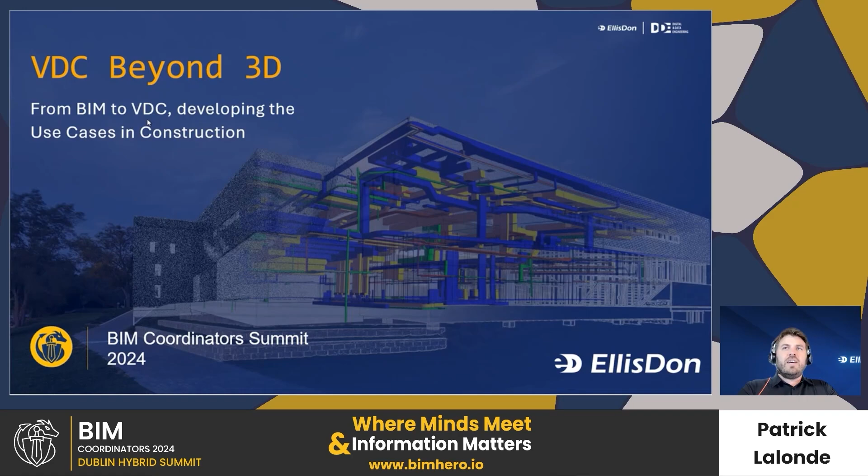So a little bit about myself. Patrick Lalonde, Senior Director of Digital Project Delivery at EllisDon, one of the largest general contractors in Canada. I've been in the construction industry for about 20 years, working both as a laborer in the office and kind of at a corporate level, as I do now. Been with EllisDon for about 13 plus years.

I served as an instructor at Algonquin College Center for Construction Excellence in their BIM Lifecycle Management Program for about 4 years, 2018 to 2022. I sit as a committee member on the CSA group, the Canadian Standards Association, for the digitization of information for the built environment, otherwise known as ISO 19650, and the implementation and adoption of that within Canada.

I also sit on the construction management think tank of Building Transformations, a national industry organization in North America, and I'm a board member of buildingSMART Canada, as well as a board member and founding member of Digital Built National Capital Region, a local advocacy group for digitization in the built environment.

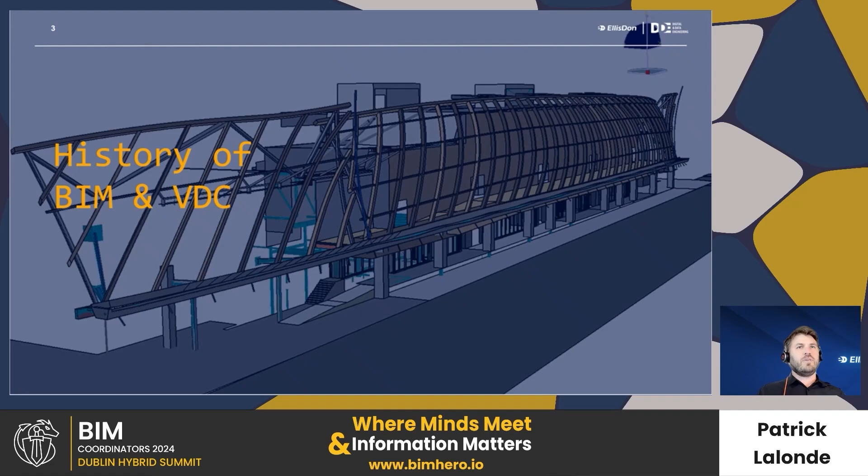So I want to get started by talking a bit about the history of BIM and VDC, where things came from and how we got to our current state of the use of the technology. So drafting and illustrating, engineering documents, blueprints, and communicating design intent came from the traditional methods of pencil and paper drafting, taking a three-dimensional concept, converting that to 2 dimensions on paper, and those were the blueprints that were sent to the site to execute and build. So, throughout the 50s, 60s, before computers, that was the main way to do that.

Then in the early 90s came AutoCAD, or computer-assisted drafting, which essentially digitized that process of traditional manual drafting, pencil and paper. So that was an evolution of that process, a first step towards digitization. But what really came as more of a revolution to the process was the introduction of building information modeling. I've got that in there as about 2005, where it became mainstream, but I guess that's still up for debate. But mostly mainstream around the mid 2000s.

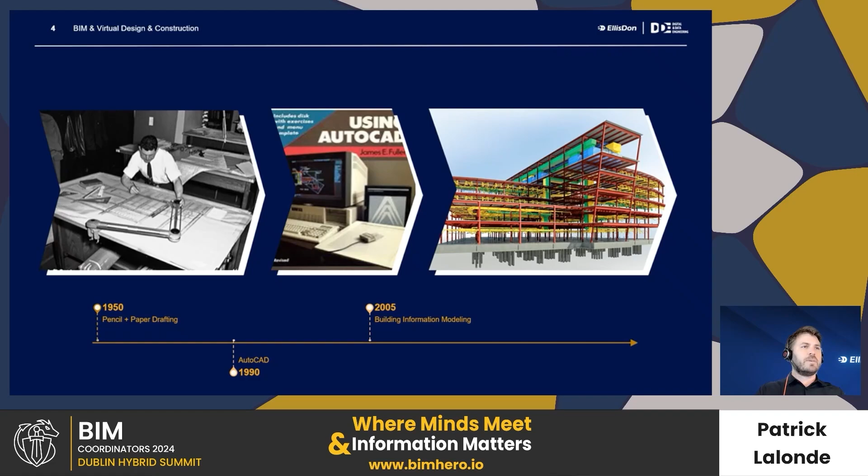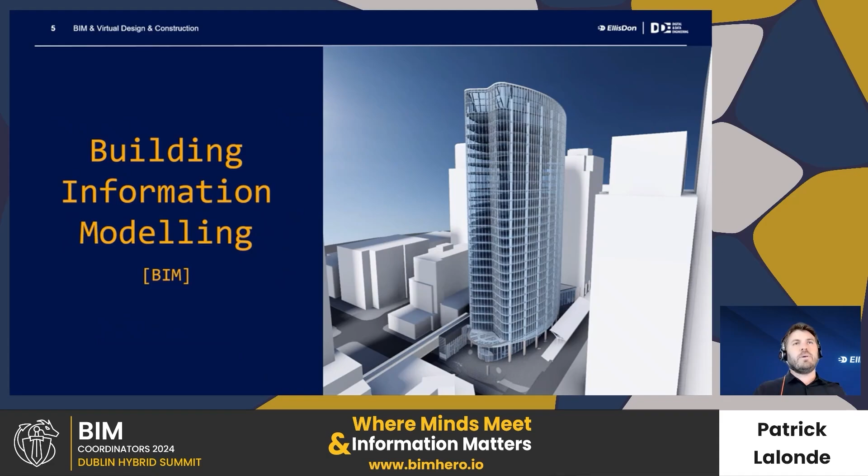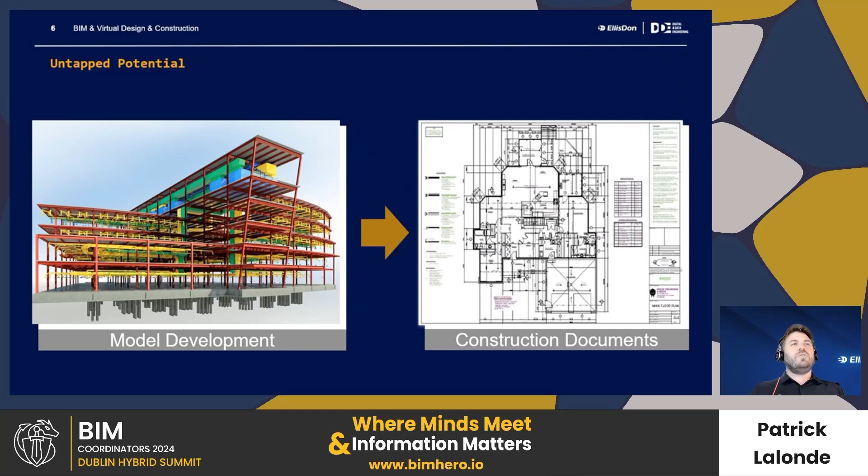Building information modeling can be defined as that process of creating an intelligent 3D based model that gives AEC professionals the insights and tools to effectively plan, design, construct and manage buildings. It's really the definition of that process, building that information model. Traditionally, model development was only done for a single purpose: to produce those blueprints. Going back to the early days of drafting and 2D CAD, we still had that same mindset of developing the model only to produce 2D drawings. So there was a huge amount of untapped potential because we had this very intelligent 3D model and we were reducing it down to 2D PDFs and blueprints.

Over time, we started to realize the potential in these 3D models to do more than just produce the construction documents. They were also supporting our logistics planning and the scheduling and sequencing of work. We were able to use them for quantities and material estimates, for fabrication and prefabrication through digitized processes and CNC machines, and for advanced coordination, bringing all those models together and understanding what we intend to build and how we design it. And then the visualization piece of seeing the design intent in that 3D medium helps to visualize, understand and communicate throughout the process.

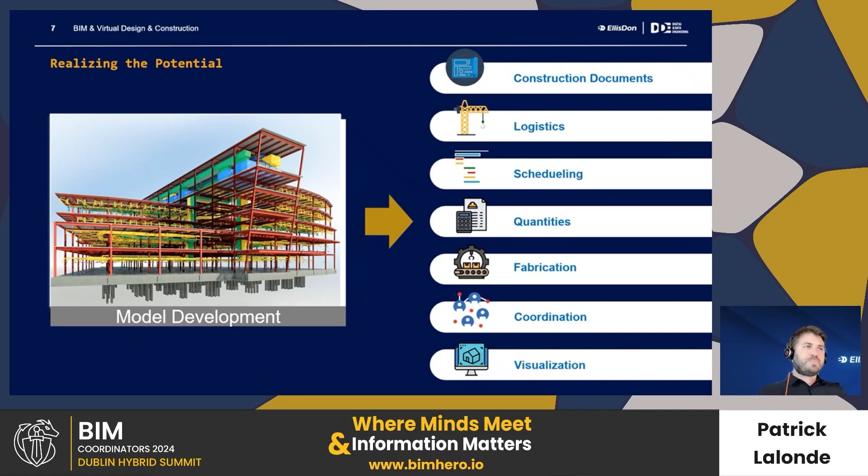And so that's how we got that transition from building information modeling to virtual design and construction. VDC is an acronym that we use to encompass all of the ways that we use those BIM models throughout the construction process and throughout the building life cycle.

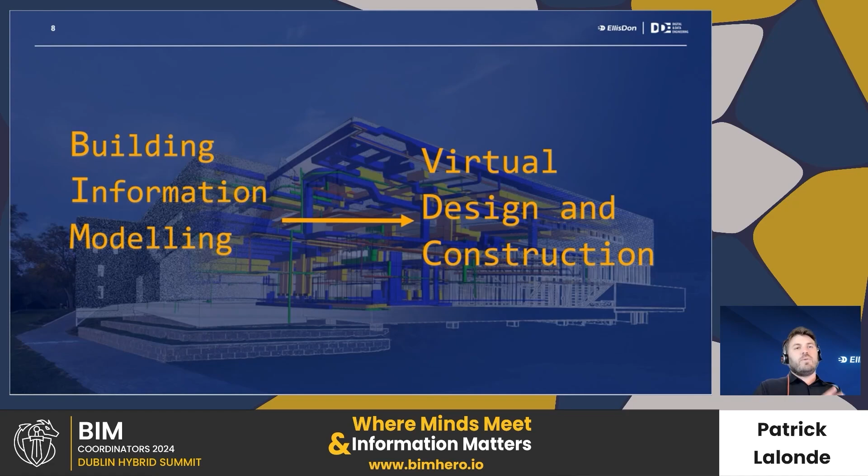And that's where we come down to the VDC use cases. So we've kind of broken down how we use the BIM models throughout the construction process for very specific functions and outcomes throughout the project.

And so those use cases are defined into sort of buckets or categories, one being 3D coordination, 3D modeling, 3D logistics, 4D schedule and progress tracking, quantity takeoffs, augmented reality, virtual reality, and extended reality, BIM asset management, reality capture with drones, reality capture with LiDAR, reality capture with 360 photos, and the BIM management piece. And I'll go into details a little bit about explaining these use cases.

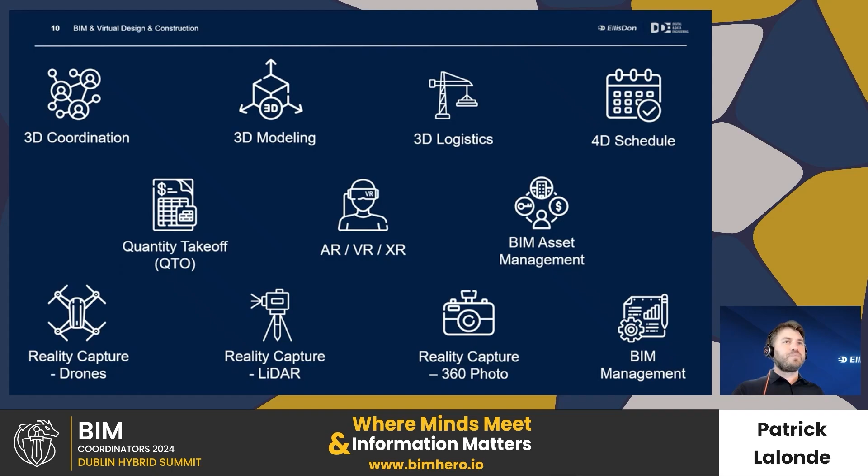So with 3D coordination, that's really the bread and butter of what VDC does: centralizing all of that 3D information into a single source of truth, and then using that to visualize and understand how multidisciplinary systems interact with each other and work together, sort of virtually building the building first and working out all those issues.

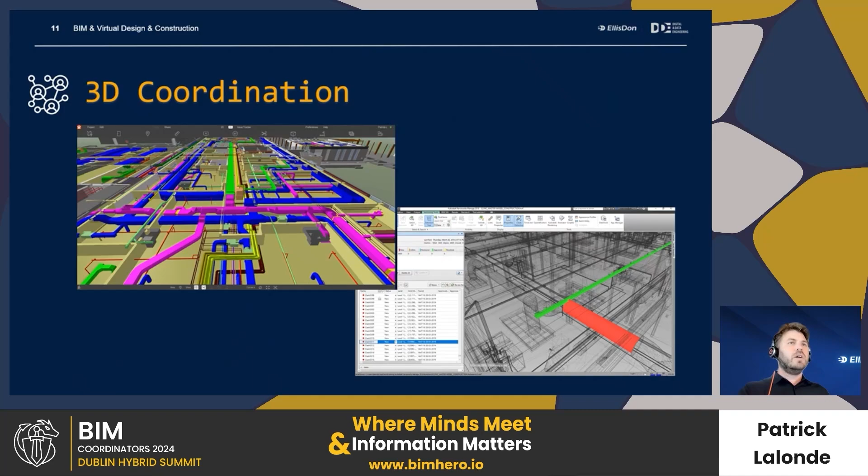And so I like to make the association of what 3D coordination is. It's not a revolutionary concept. It's not a new concept that we've introduced into the industry. It's just an evolution of what we've already been doing. Just we're doing it with different tools.

So I use the Lightbox version 1.0 as an example of the exact same process with two-dimensional paper, laying multidisciplinary drawings on top of each other on top of a light box, and you can see it makes the drawings transparent, so you can actually coordinate and see the different systems and if there are any conflicts.

And so it's exactly what we're doing in the BIM world and the VDC world with the models and projectors, that sort of Lightbox 2.0. Exactly the same process, same people around the table doing the same thing, but with more advanced technology.

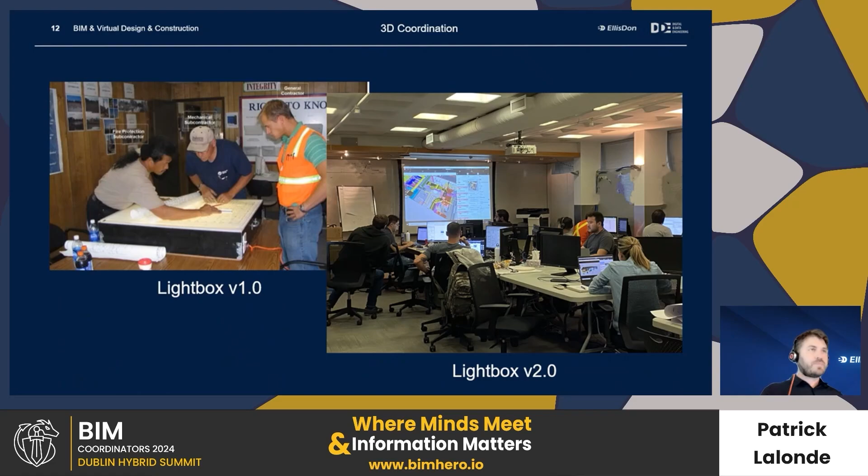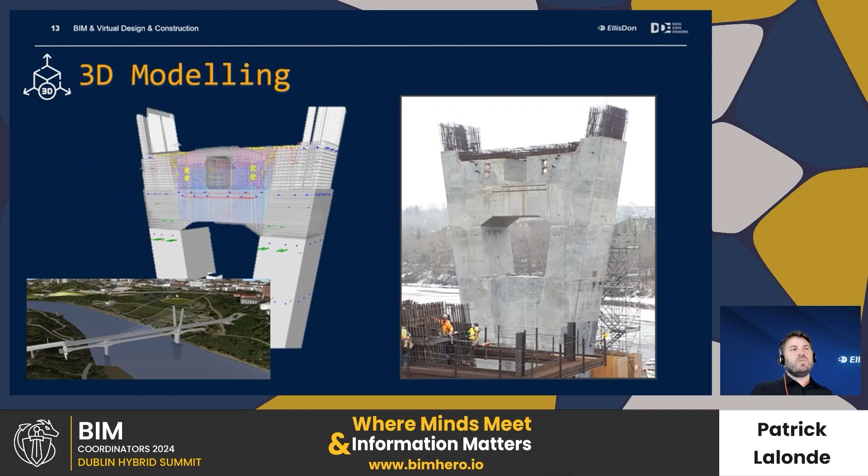The next use case is the 3D modeling. We're actually creating very detailed 3D models of exactly what we're planning to install in reality. So in this example, we've got very detailed rebar and sleeving of a bridge pier, so that we can accurately understand and work out any issues associated with all of those components and detail it very specifically in that virtual environment, so we can execute very efficiently in the real world.

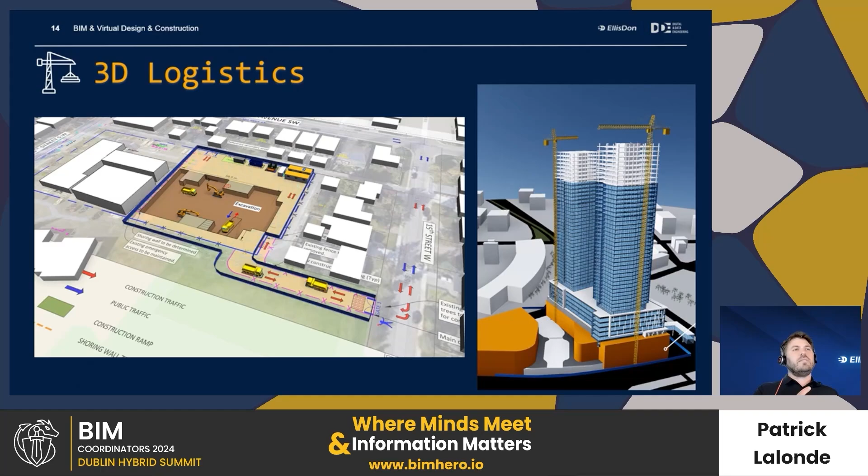3D logistics is taking those logistics plans, which were traditionally done in PDFs. We can insert the BIM models into logistics planning software, create three-dimensional models of all of the road shutdowns, hoarding, excavation, ramps, tower cranes, and start to understand all of those other pieces that make up the construction site.

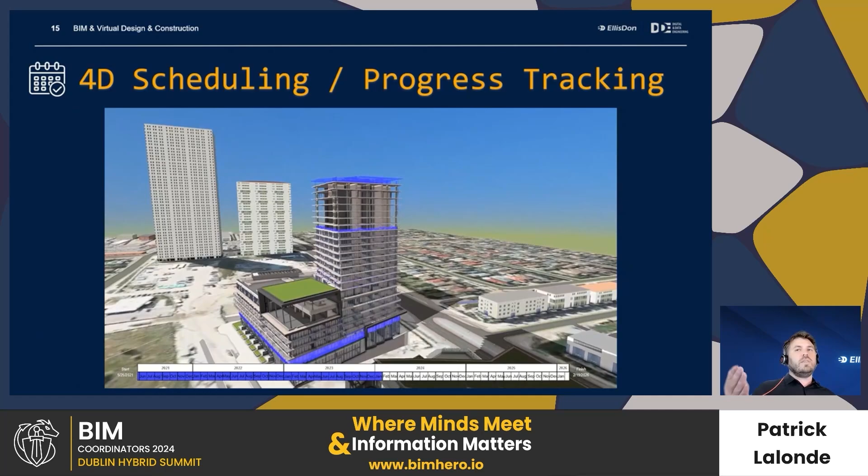The 4D scheduling and progress tracking, that is taking that 3D model and connecting it to a schedule and being able to animate and watch the sequence of work. So what that entails is taking a traditional Gantt chart schedule with activities and line items, start and finish dates, and connecting those line items to the geometry in that 3D model. And so you have that time plus 3D equals your 4D.

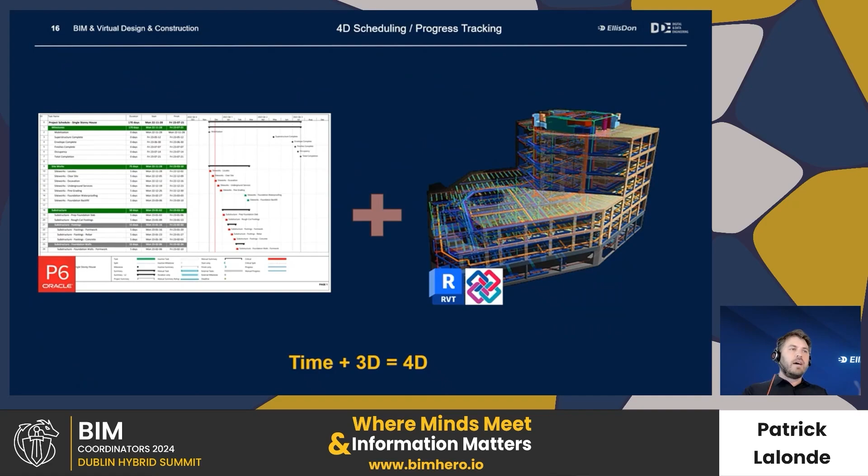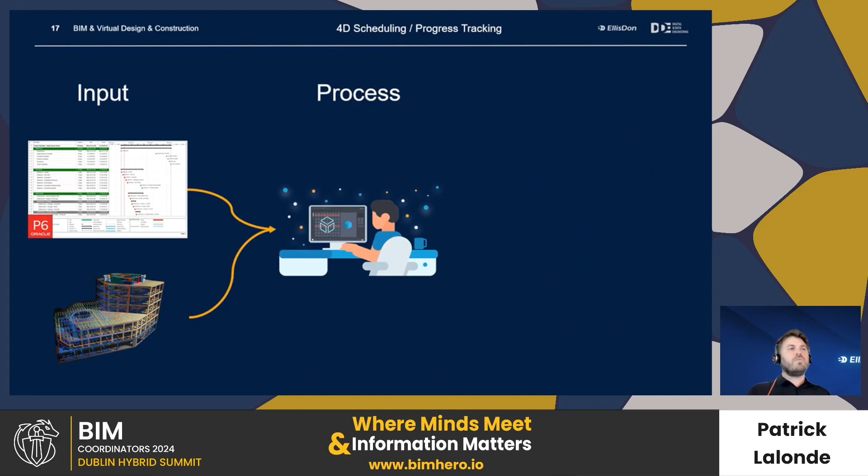And so what that requires is inputs of your schedule, your 3D model, and then you need to process that information, connecting those elements in specialized software, and then you can have the output of actually having that animation or that video to watch to illustrate that construction sequencing.

And then you also have BIM progress tracking, which is an extension related to the 4D, but a bit of a different process. The 4D animations typically project the baseline construction sequence that you're planning to do, and then progress tracking is actually ingesting more actuals back into the system and tracking exactly how the different components are starting and finishing.

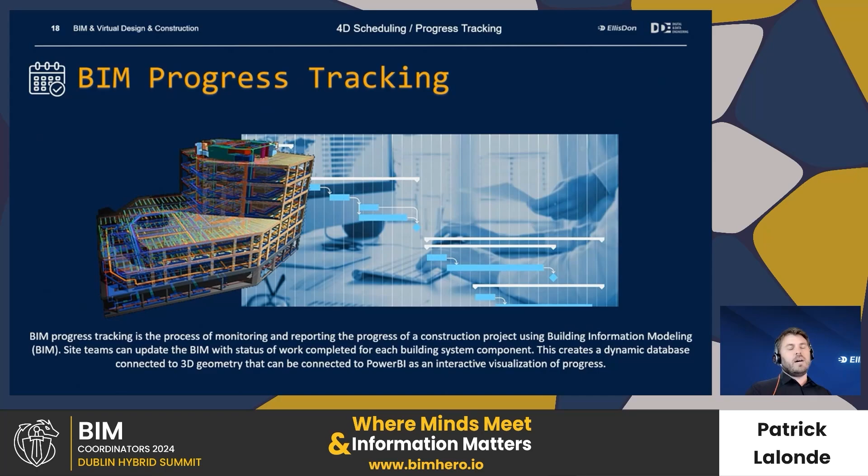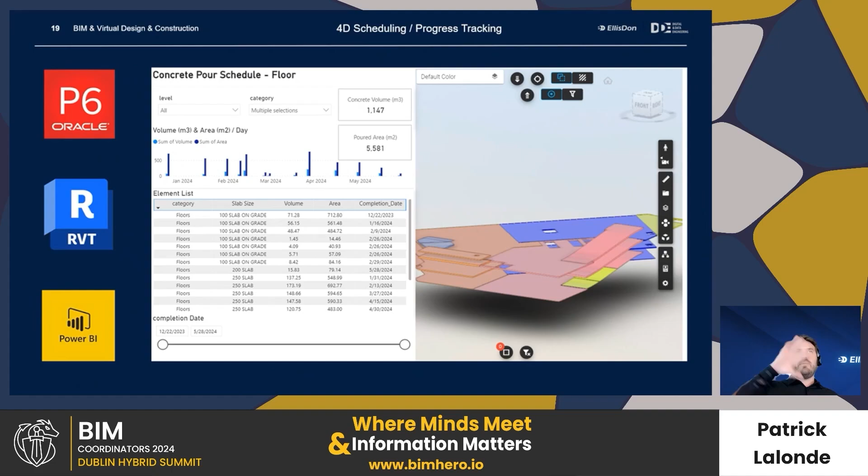So we can take in the Revit models, the schedules, and plug that into Power BI software, and itemize exactly the different pieces and the start and finish dates and volumes and quantities associated with those. So we can actually track more detailed progress throughout construction with methods like this. So the 4D animations is one thing, and then the progress tracking is another thing, but they're very interrelated.

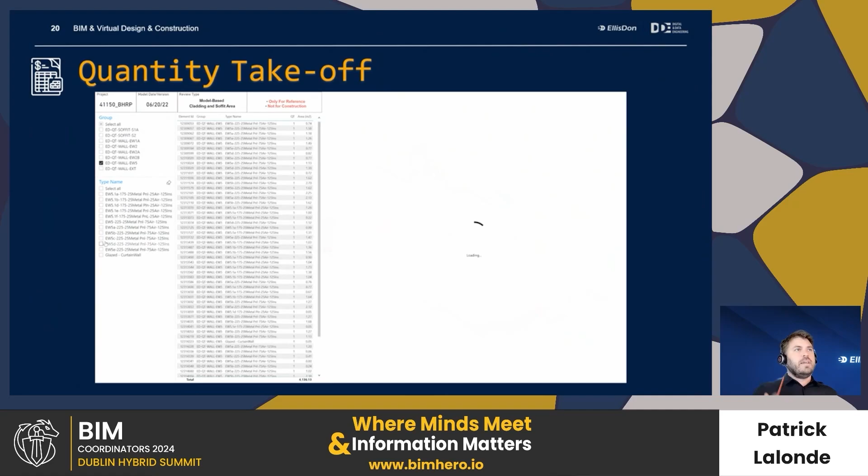Next, we have quantity takeoff. So thinking of the models as an itemized inventory of all the building systems and components. We can catalog that, itemize, sort and filter all of those components, and get easy quantity extractions and lists of all of those building systems to support design development and to support the procurement process.

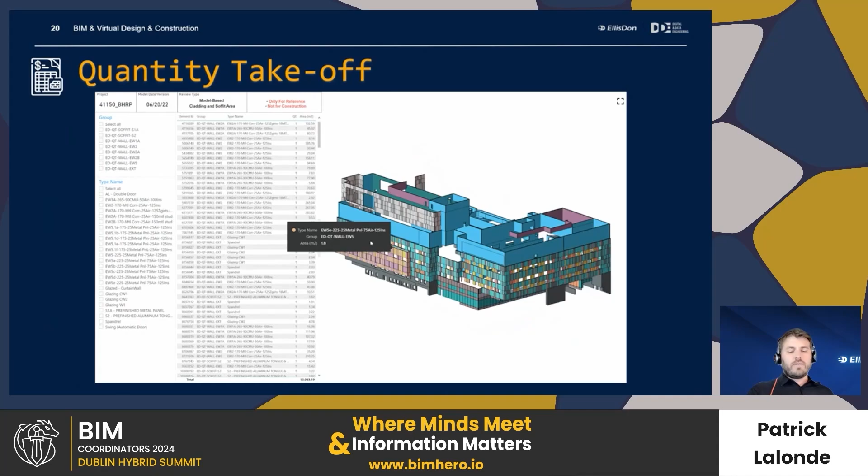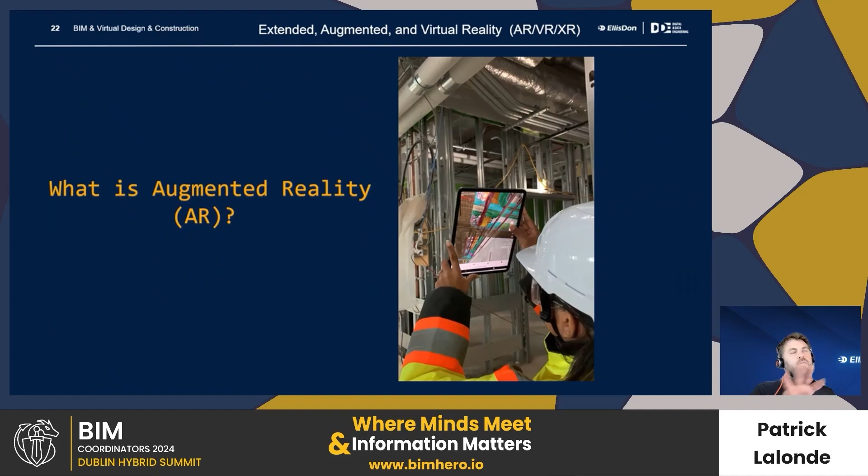Next we have extended reality, which is both augmented and virtual reality. Augmented reality is essentially overlaying the virtual environment, the 3D model, with the real environment. Using devices such as an iPad, iPhone, or sometimes a headset, you can overlay the 3D model with the real space, so you can walk out on site and see exactly what is planned to be installed and how it interacts with the physical environment.

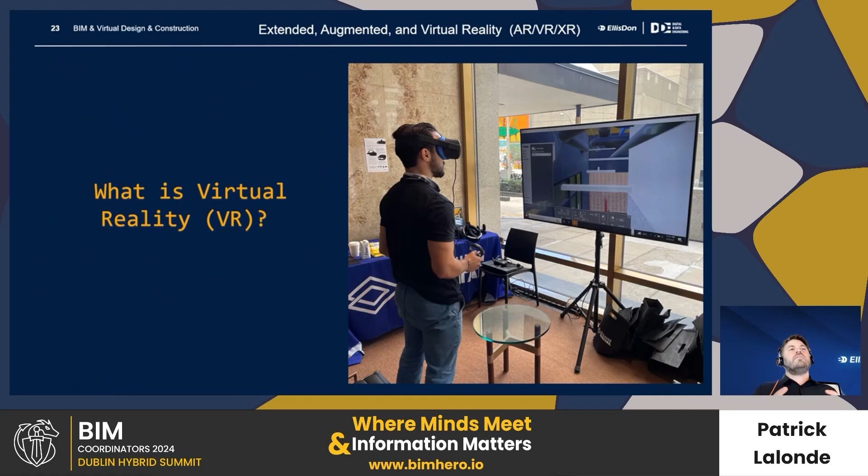And then there's virtual reality, which is similar technology but slightly different because it's more of an immersive experience. There isn't the combination of the virtual and the physical. It's completely immersed in the virtual world, so you can really get a sense of the environment and the space that may not exist yet.

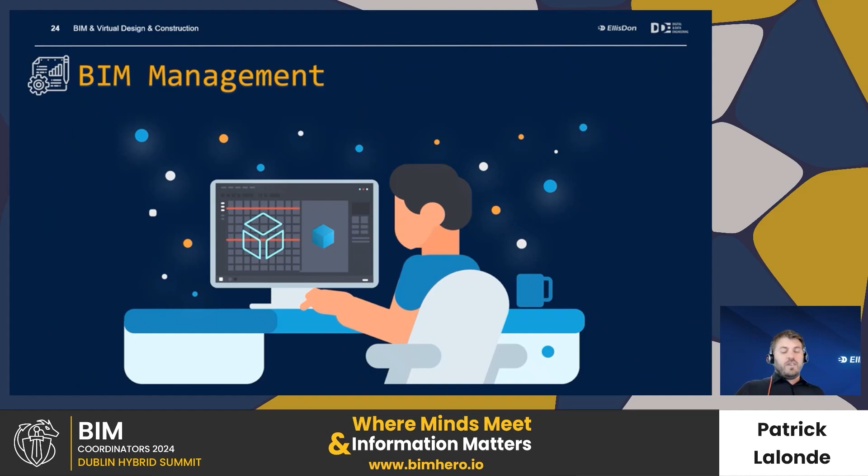And then you have the BIM management side of things, which is a hugely important part of the VDC process, because setting up the VDC process is just like managing any project. You need to plan accordingly, you need to scope the activities, and then you need to manage and monitor that those activities are being done and the deliverables are being met within a certain time frame.

Key components of BIM management are the standards and contracts, making sure that you define the specifications, the formats, and any other technical requirements for the project; setting up the workflows, making sure that all stakeholders understand their roles and responsibilities and know the process; setting up the collaboration procedures, managing the communication and coordination between the stakeholders;

defining the quality control, the accuracy and completeness of the BIM data, and making sure that it's done accordingly and complies with the requirements. And then there's the training and support, making sure that everyone knows how to use the models, is using them effectively, and understands how to access the information that they need.

Next is BIM for asset management. So thinking of the model as that digital inventory of all the building assets that can be used for quantity takeoff, but you can also use that as your library or your catalog of all the building systems, all the pumps, all the mechanical equipment, and right down to any level you want, such as furniture or things like that.

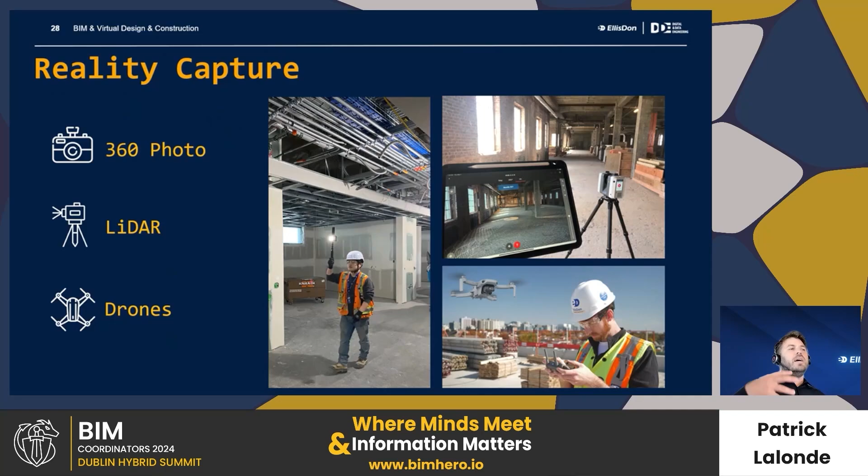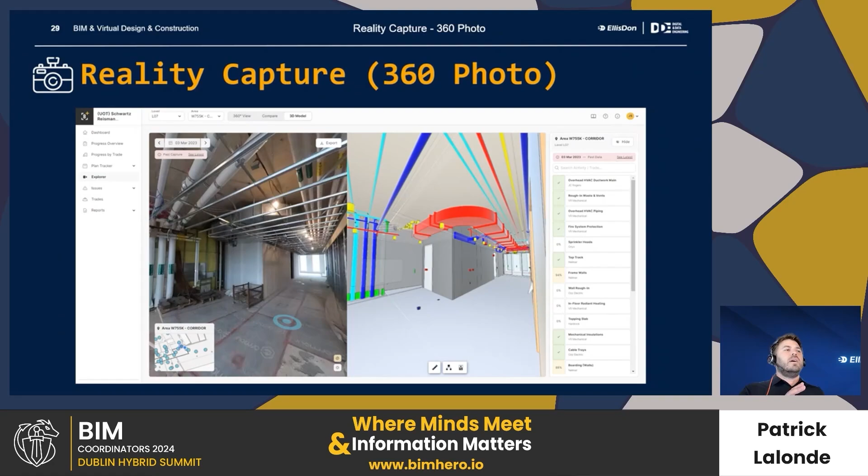And then the reality capture piece is broken down into three categories, depending on the capture method. There's 360 photos for interior, LiDAR, which is a laser-based system, and drones for aerial photography. Reality capture with 360 photos is more for interior aspects of the work, tracking the walls, the mechanical systems, the installation, that sort of thing.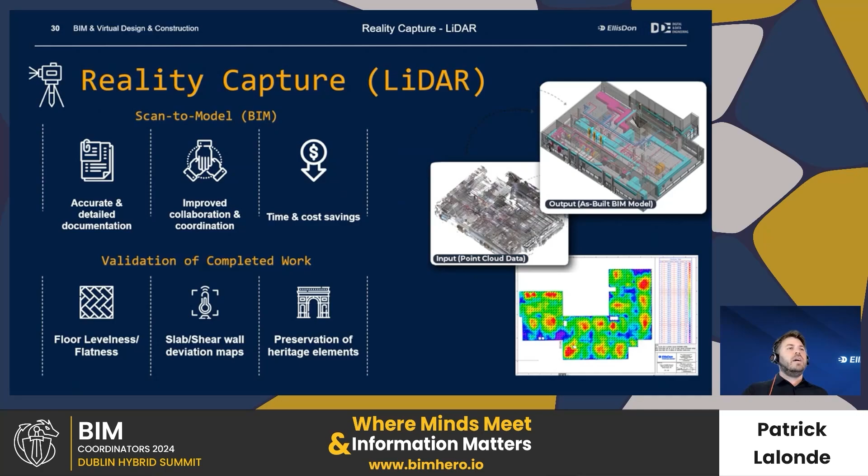Reality capture with LiDAR supports the scan to BIM process, validating completed work, doing analysis on concrete and geometry, more for detailed and high accuracy use cases. And then there's reality capture with UAV drones, which is more of that bigger scale, exterior, looking at the site, the foundation work, excavation, steel erection, all that exterior site work. That can be captured with the UAV drones.

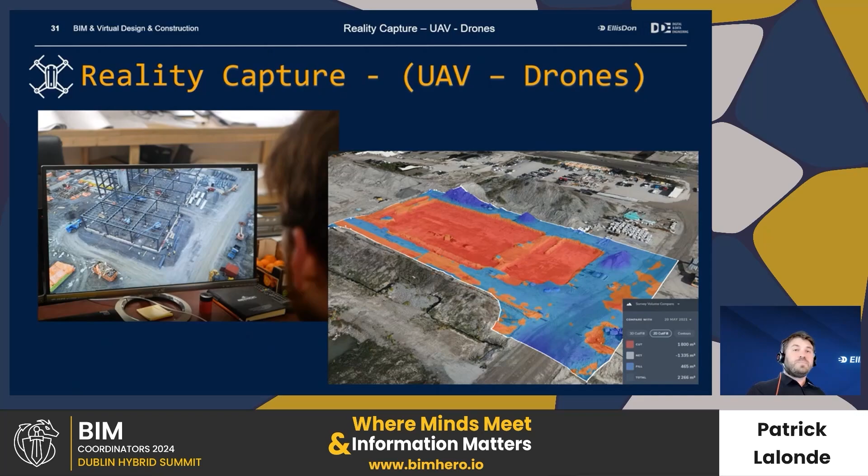To summarize, all these use cases, all this virtual design and construction, has really been fueling a paradigm shift in the construction industry, offering a more intelligent, efficient, and sustainable approach to project management. And as technology continues to advance, the adoption of digital construction practices is expected to become more widespread, shaping the future of our industry.

VDC is not only about 3D models, it's about creating a cohesive, data-rich environment that empowers efficient decision-making and collaboration throughout the project lifecycle. As the construction industry embraces innovation, VDC will continue to evolve and play a pivotal role in shaping the future.